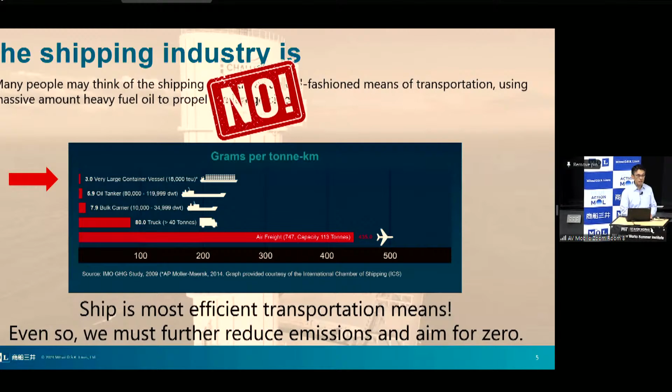Although shipping is already efficient in terms of emissions, I like to say that we have to aim for net zero emission from shipping services as well, towards the end of 2050.

This is the beginning of my today's presentation. You can see the vessel on the sea, and you can see the sail, a big sail at the front of the vessel. So I'd like to say welcome to the new era of shipping, and let me continue.

If we look at the global activities and ambition towards the reduction of greenhouse gases, you can see that in 1997 in Japan, the global countries announced the Kyoto Protocol, which I think is the substantial start of thinking about decarbonization for the future. Our challenge, the Wind Challenger project, starts after the Kyoto Protocol and before the Paris Agreement.

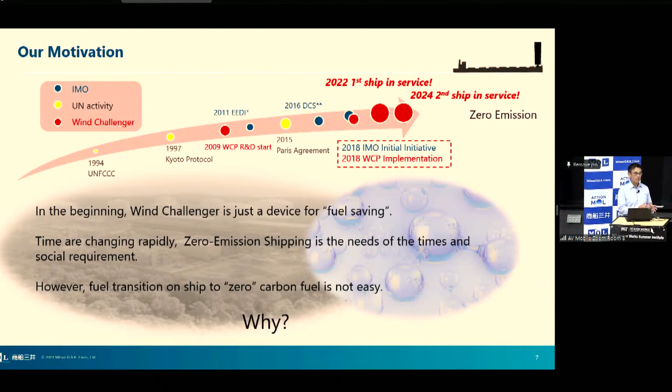I'd like to say why we started this program. Initially we were thinking this program would contribute to saving fuel, meaning saving the money we spend. But time has changed, and now we all think about net zero emission, decarbonizing, reducing greenhouse gas emissions from industries. So nowadays our technology is more focused on the purpose of reducing greenhouse gas emissions from ships.

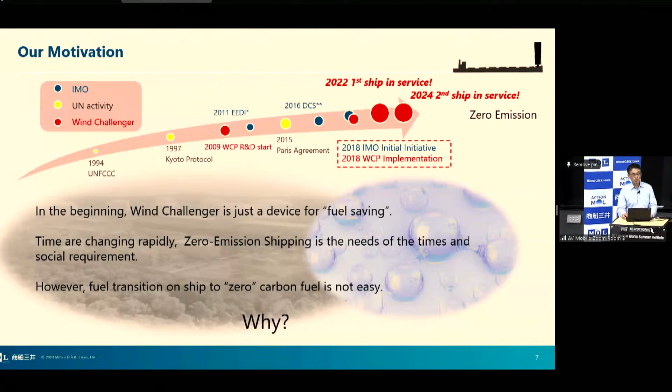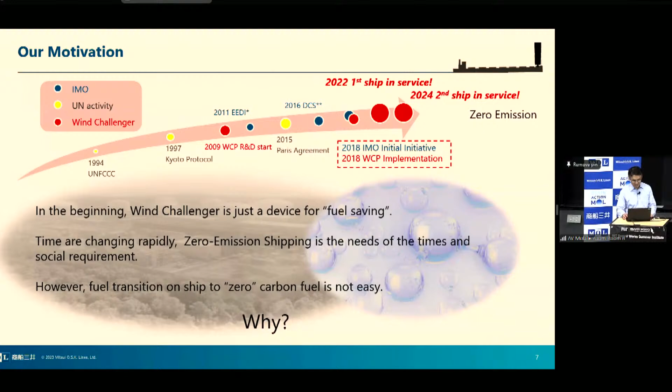But I'd like to say that net zero emission of shipping services is really difficult to achieve. Many people say that shipping and aviation are the hardest to abate business sectors when it comes to decarbonizing their businesses. The reason why is that technically we already have hydrogen-based fuel, liquid hydrogen, ammonia as a hydrogen carrier. This is already technically available, but it costs a lot compared to the existing crude oil-based fuel of the maritime industry. Probably the price of the new generation green fuel is more than 5 times higher than that.

Also you can see on the left the lower energy density. Compared to oil, these hydrogen-based fuels have less energy density per cubic meter, for instance. That's why, in short, we need to secure large spaces on board to store the energy to propel the vessels, which means we have to use many spaces just for keeping the fuel. We really want to carry the cargo. We don't really like to carry the fuel only. That's why this is really the challenge.

That's why we're thinking that first, towards net zero emission of shipping, we have to try to minimize the consumption of energy as much as possible. There are many technologies, and today I'd like to introduce one that we are very ambitiously trying to achieve.

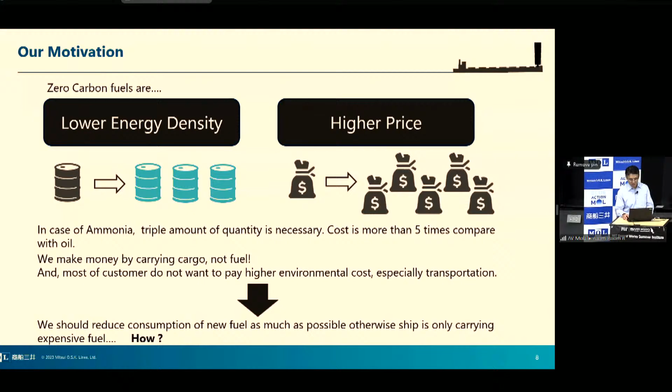Before coming to more detail, I'd like to touch upon the history of ships a little bit. In old ages, ships were propelled by wind sail only. There were no engines on the vessels, but it was less efficient, less speed. After the 19th century, we started to utilize steam turbines, and the fuel of the steam turbine was coal. But nowadays we don't use any coal for the propulsion of vessels. We changed to heavy fuel oil, which is a part of crude oil, with diesel engine technologies. And recently, we are gradually starting alternative fuels, particularly liquefied natural gas, which is a cleaner fuel compared to crude oil-based fuel.

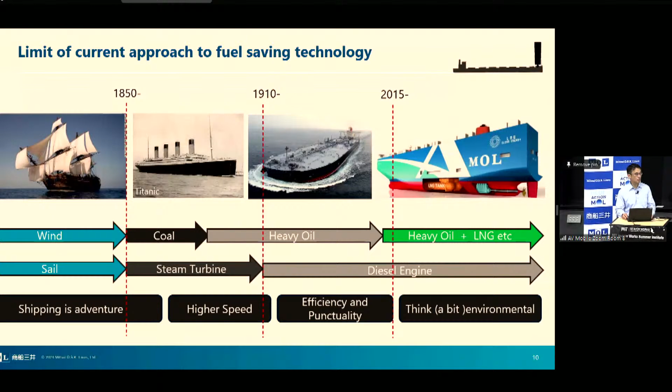But the technologies we have made for the purpose of reducing fuel consumption and energy emission from vessels mainly happen underwater of the vessels. This red dotted line is the water line. In history, many engineers tried to make every effort to minimize the reduction and minimize the friction of the drag, whatever the things, in order to reduce the resistance on the hull. Engine technology has also been developed from steam turbine to diesel engine. Everything happened under the water.

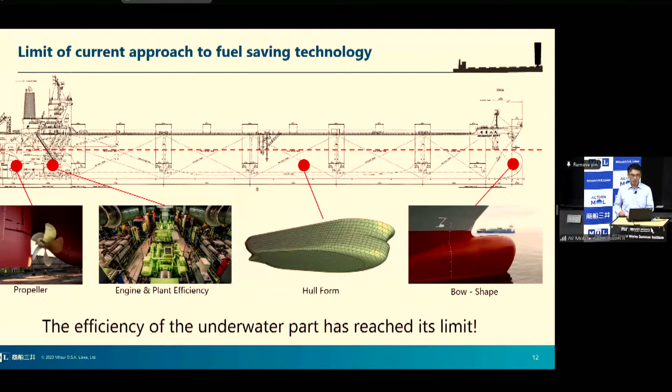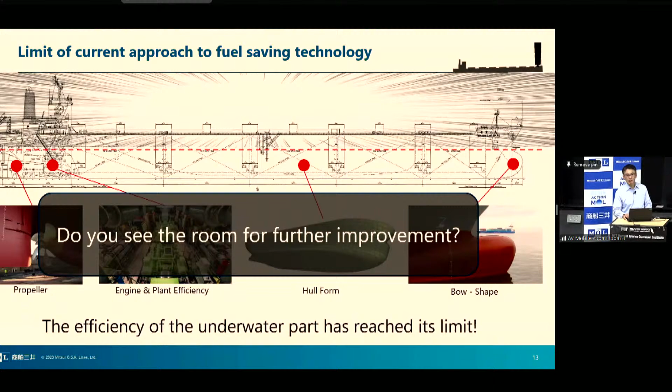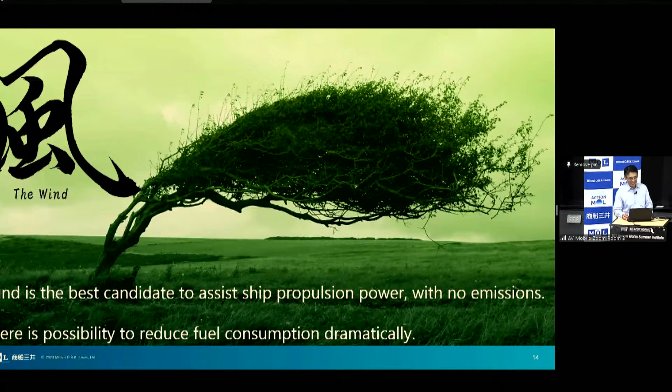But do you see any room for further improvement for shipping technologies? We are thinking, why don't we think about the spaces above the waterline? That's again the wind. I mentioned that in ancient years we used wind power to propel vessels. Let us think about wind power again. Our way of thinking is that, of course, we maintain the existing ship technologies, but on top of that, if we have a set of wind sails like this picture, what happens? How much savings can we achieve? Let's imagine.

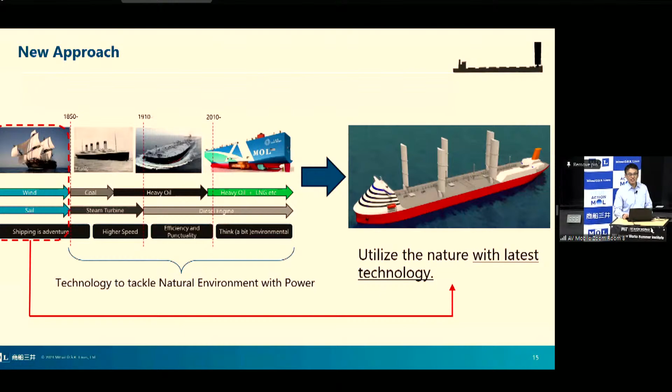So we started with this concept, initially as a research and development program.

Initially in Japan, the program was launched under the name of the Joint Industry Project. The leader of this JIP was Tokyo University in Japan, and several industry players, including MOL and other shipping companies and manufacturers related to shipbuilding, joined the program

in order to launch wind sail technologies in the shipping industry. You can see the videos. Sorry, today I have videos but no music, but I'm going to explain what's going on. This is an onshore-based trial showing what happens if the wind sail moves like that, and how the effect will be.

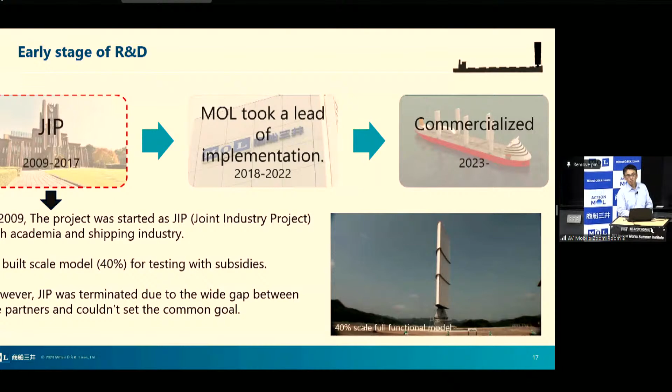Initially, for more than 7 to 8 years, the university-led JIP made some achievements. But unfortunately, many partners, our competitors in Japan, and manufacturers left the JIP, because in those days people didn't really feel that this technology would fly.

But we were thinking that this project was too good to terminate. We believed we should hold higher expectations that we can use wind power for vessels. That's why we decided to take the championship to continue this program. I'd like to say this is the start of the suffering and the many programs leading toward the achievement, which I can explain later on.

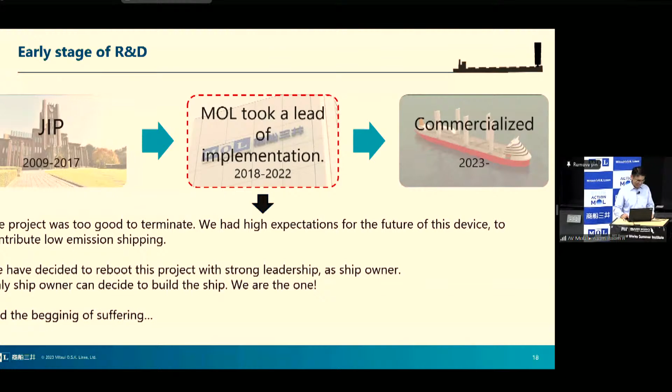After the research and development phases, of course we need to jump into the design and engineering phase. The JIP brought some ideas and outcomes, but this was just an on-land basis demonstration of the wind sail.

But we are operating vessels, and the sea environment condition is much tougher compared to the onshore environment. That's why we have to think about the behavior of the wind sail if we install it on vessels, because the ship is always exposed to heavy wind and wave, and the ship is always moving.

And we want to really carry the cargo, we don't like to waste it on the steel product. That's why we have to think about reducing the weight of the steel. This is another challenge.

Also, in the shipping industry, shipping companies always have to take insurance for their services from insurance companies. In order to get insurance from a third party, we need to assign a certain certification body to make sure the product is really okay from a safety point of view. That's why we have to engage what we call the classification society, which certifies the project for maritime use.

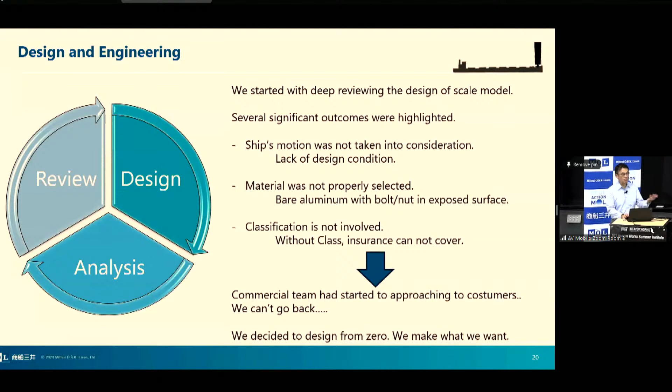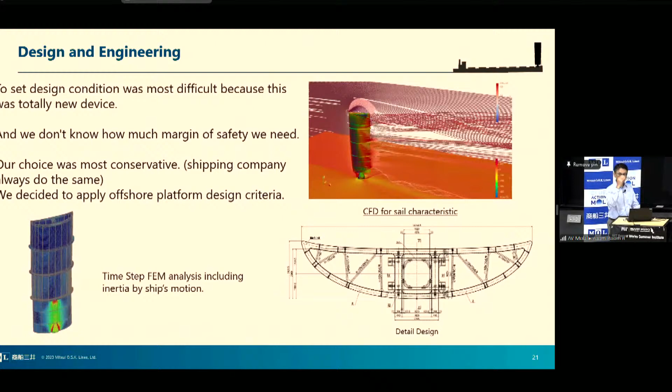For design and engineering, we have quite nice means of calculation, like computational fluid dynamics - you can see at the top. Also, structural rigidness is quite important, so we have carried out calculations to estimate how rigid our sail is.

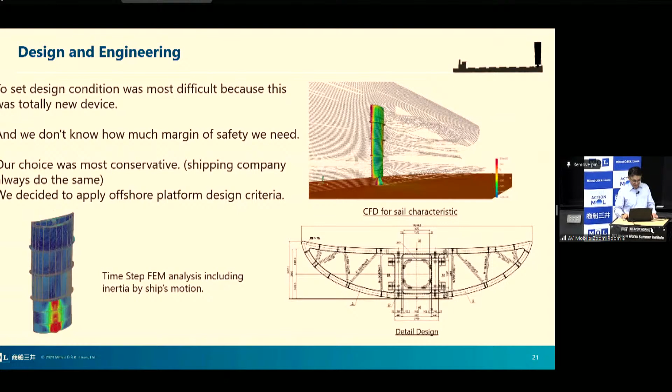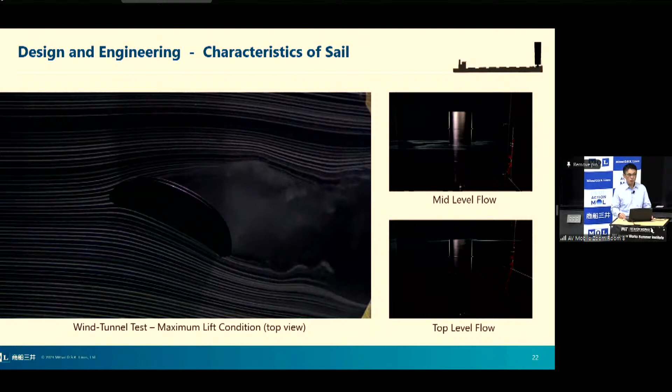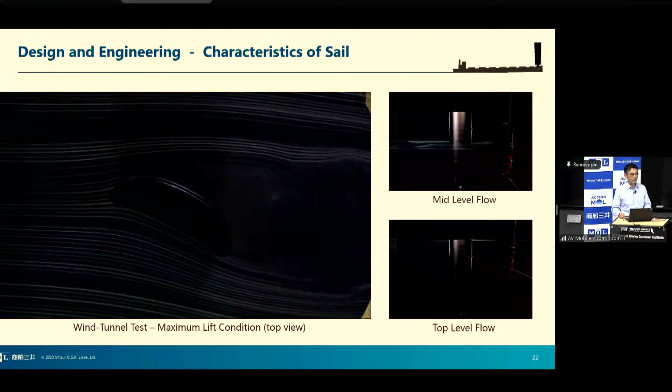Also, calculation is not good enough in many cases. That's why, in order to evaluate the efficiency of the wind sail, we have carried out wind tunnel tests to visualize the airflow, and also estimate and calculate the lift activated on the sail. You may imagine that the wind sail has exactly the same features as an aircraft wing.

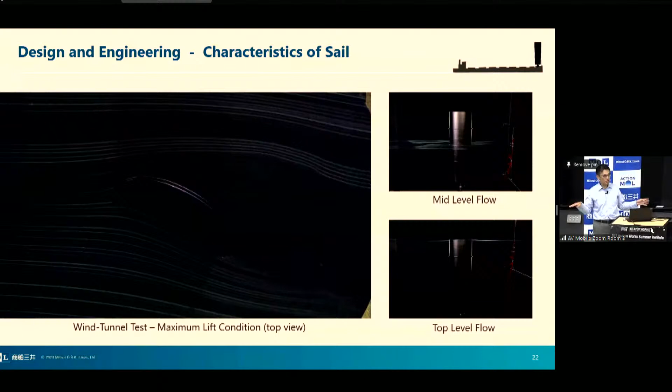Having carried out those calculations and wind tunnel tests, we came to the theoretical conclusion of what wind condition is the best fit for the purpose of saving energy on ships. In short, I'd like to say that if we have wind from the left or the right relative to the vessel, this is most efficient.

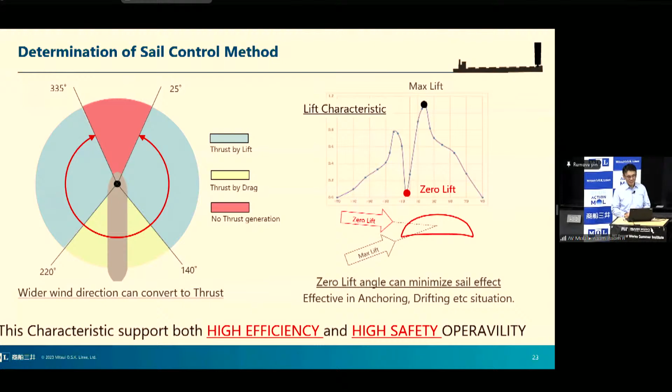More specifically, if the wind is coming from the head, from the front of the ship, we don't really expect an improvement in efficiency - we don't really achieve lift from the sail. That's why, if we have a headwind, we don't use the wind sail. We try to position the wind sail as shown in the picture on the left, lowering it down in order to minimize the drag caused by the wind sail.

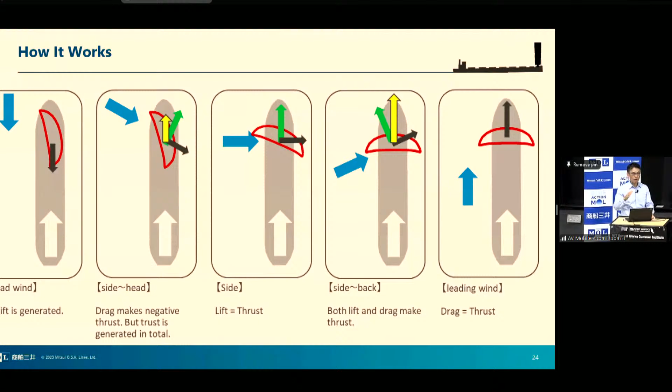But if we see a lateral wind, we start to operate the wind sail like that, and we assume a big lift happens on the wind sail, and this thrust helps to propel the vessel. The engine propulsion power is then reduced, so we can minimize the energy consumption of the engine itself.

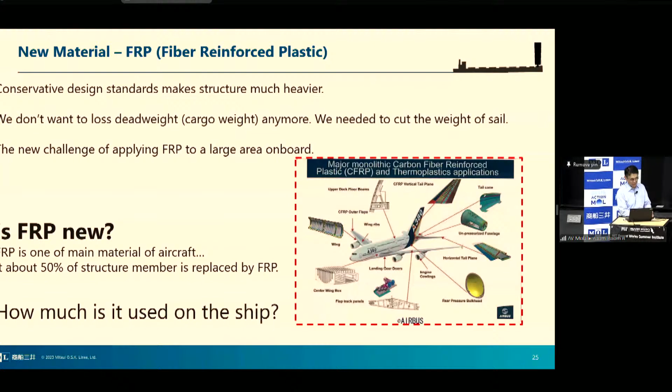On top of that, the material is quite important to make the product as cheap and light as possible. So we came to the conclusion that we could probably use FRP, fiber reinforced plastic. The weight of FRP is much less than steel or any other metal product.

We can imagine where FRP has already been used on vessels. This is one of the vessels we operate, a very large crude oil carrier, with a length of 300 meters - quite a big ship, mostly steel made. FRP is only used for this area, which is a kind of rescue boat for the purpose of people working on the vessel to evacuate from the ship if an incident happens.

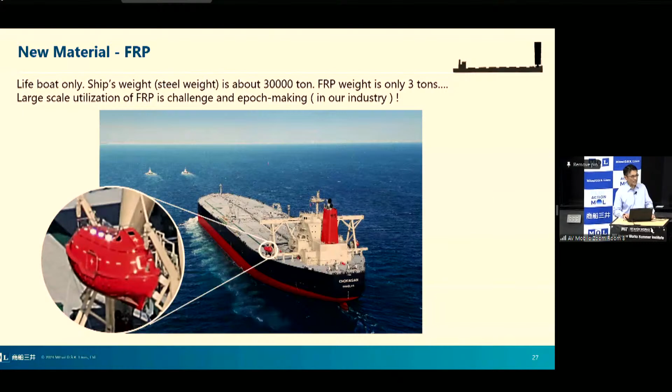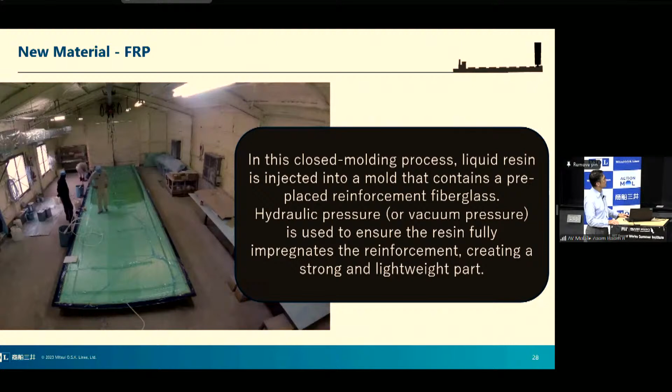You can imagine that most of the material we use for the ship is steel-based. That's why we tried to challenge that with FRP used for other parts of the vessel, the Wind Challenger. This video shows how the FRP-based component of the wind sail was made. Plastic was injected into the mold made of fiberglass. We exercised many trials to ensure the quality and strength of the components of the wind sail.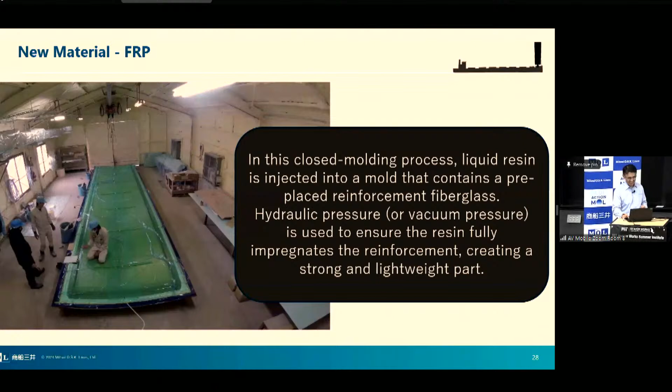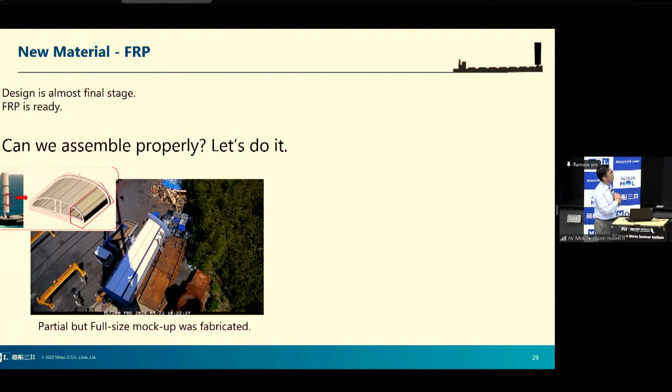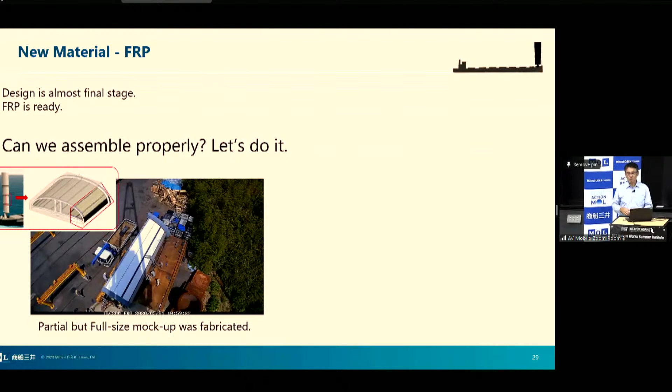After that, each component needs to be assembled into subcomponents, as this video shows. This demonstration was made in a certain shipyard, which is collaborating with us to build this Wind Challenger. We found that the assembly of the plastic-made sail is okay, we can achieve that. This is a milestone for the next, bigger assembly of the sail.

In the meantime, because this project is quite MOL-oriented, we really needed our management's understanding of the project. While we were making this trial sub-assembly of the components of the wind sail, our chairman of the board visited the site and he admired what we were doing so nicely. We also have an internal college for young colleagues working in MOL to present on the management of the future of MOL. I forget the year of this program, but in a certain year the theme of the program was sustainable shipping.

One of the guys proposed that we use this technology on a more real and bigger scale. This presentation made by a young employee really motivated and encouraged the management people. Management realized that we technical people might be doing very well for future technologies, so management started to support us. This moment was great. Without that, I don't really think we could have moved further.

Finally, engineering drawings were completed, 60 drawings for the purpose of constructing the wind sail entirely.

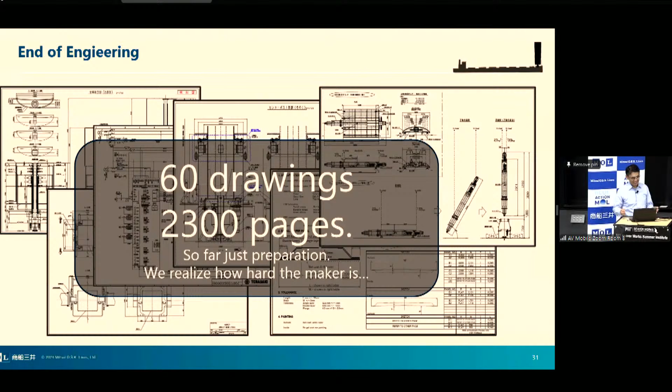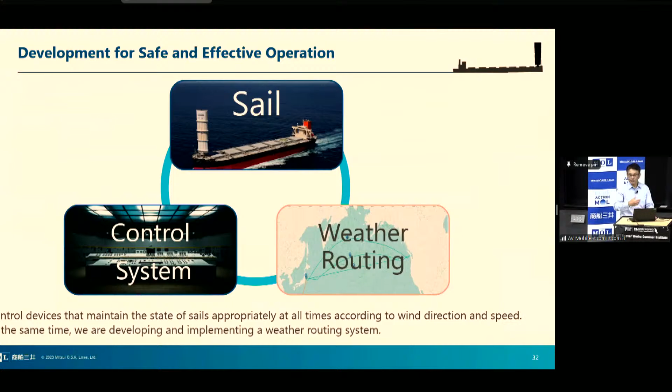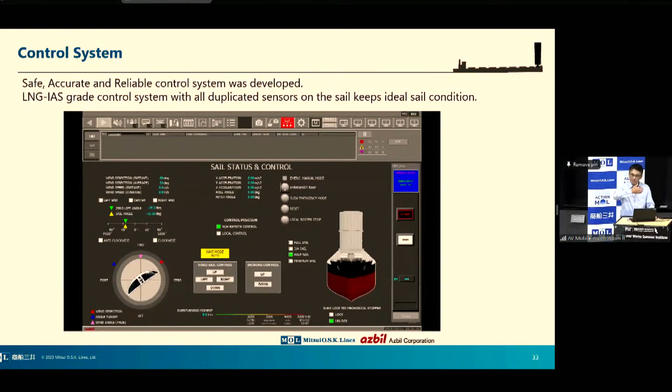On top of manufacturing the sails, it's really important for us to consider how efficiently we can use this wind sail, meaning control of the wind sail according to the weather and the weather forecast. So we worked together with a certain IT system vendor on how to nicely control the wind sail according to the weather and the weather forecast.

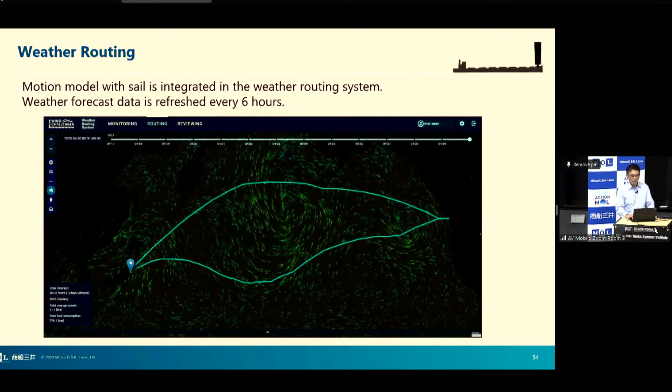More importantly, we're talking about weather routing. If we just transport from A to B, we usually take a great circle, which is the shortest distance between A and B. But now we're trying to use wind power as much as possible. That's why, ideally, we really want to catch a nice lateral wind as much as possible.

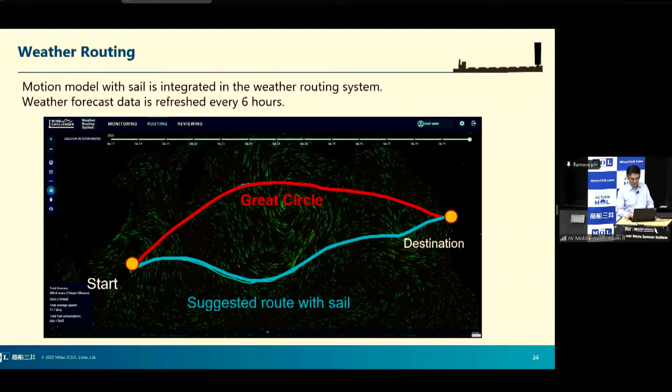A simulation showed that the suggested course, shown in blue, even though it deviates a lot from the great circle, probably saves more energy by taking that course. That's why we introduced this kind of weather routing system on the vessels, and this has already contributed a lot to savings in energy and emission reduction.

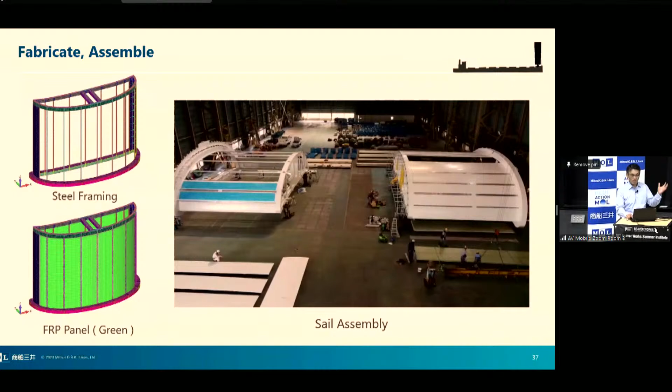This is towards the last moment of the presentation. You could see in the previous slides the sub-assembly of the components of the wind sail. This is the full-scale assembly of the wind sail. This is a shop in the shipyard, so we need big spaces. Without collaboration with the manufacturer, we wouldn't be able to achieve these challenges. We need partners, certainly, because we are a shipping company, not a manufacturer.

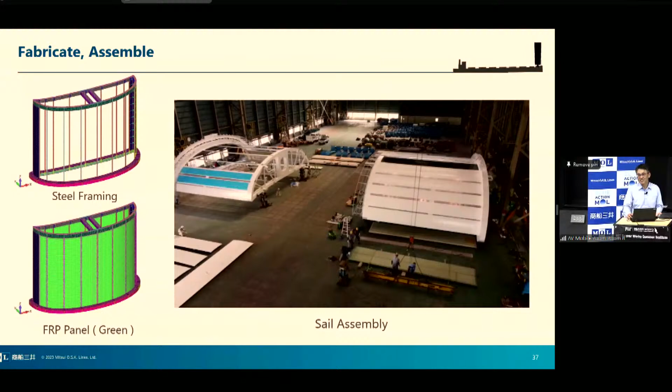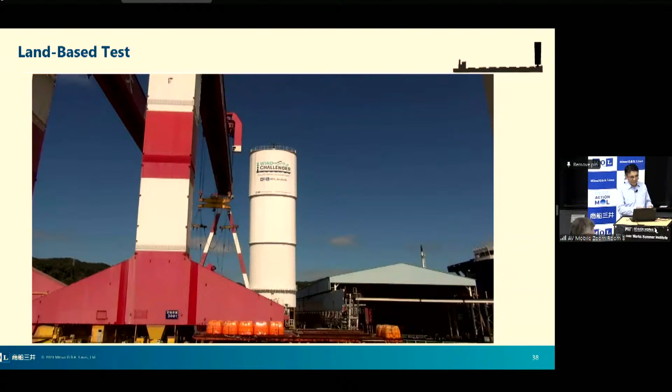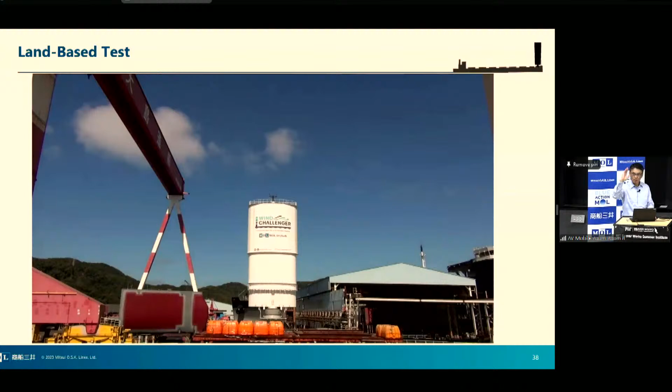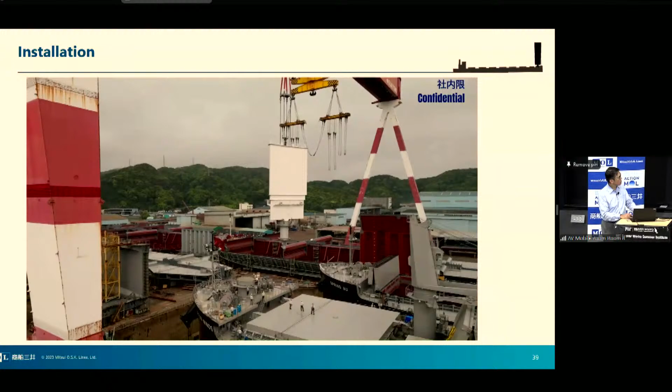This is the Wind Challenger actually installed on the vessel. Initially, we tested everything on the ground at the shipyard, ups and downs and rotation, everything confirmed. After that, we actually install it onto the vessel. Vessels are constructed on the dry dock in the shipyard, and once the vessel is mostly constructed, we install this wind sail at the fore.

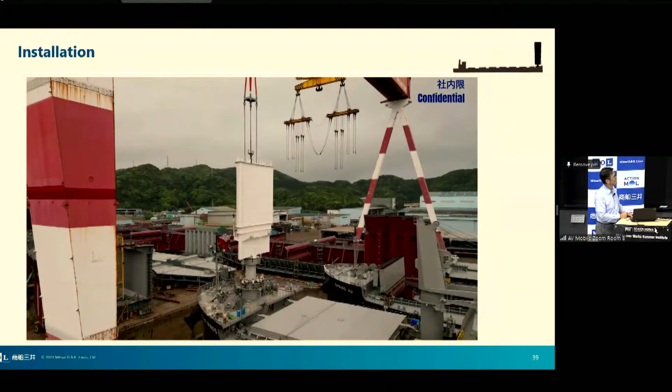And we have actually retrofitted the Wind Challenger on the vessels. It's time to see the results. This is a sailing trial where we tested the sailing system. All mechanisms worked very well in the sea. This trial was demonstrated before the ships were delivered from the shipyards to MOL. Our people joined together with the shipyard people and confirmed that the system is working quite nicely.

I have to say that in actual weather conditions we operate the vessels, and this is not calm weather at all. We mostly encounter heavy waves during the sea passages. You can see this vessel having the Wind Challenger encountered a very rough sea on a certain day, and you can imagine that the wind sail is exposed to high waves. So as I mentioned at the beginning, the wind sail should be rigid enough. If we operate the vessels in a cold and icy environment, icing happens on the structure of the sail. It's a bit difficult to see, but the picture on the left shows icing on the components of the wind sail. So the wind sail needs to be good enough to operate even in icy conditions as well.

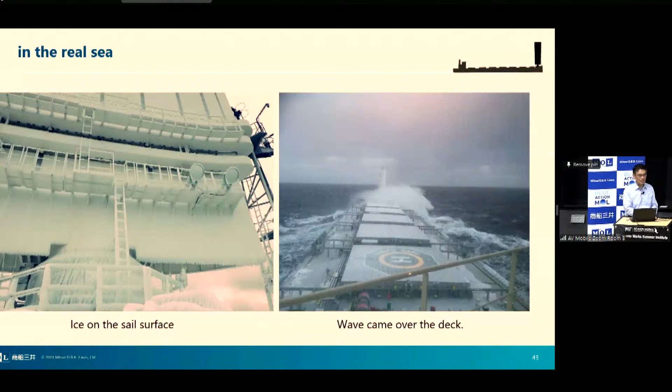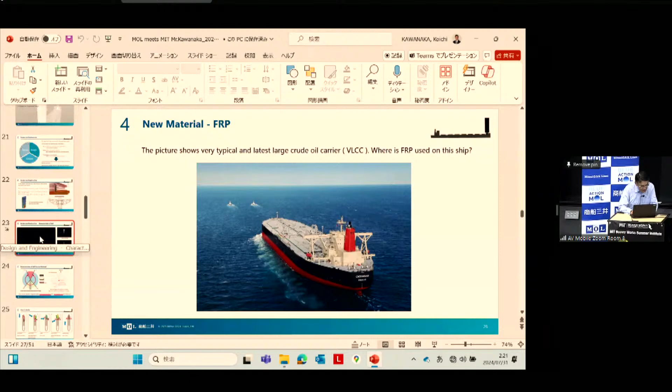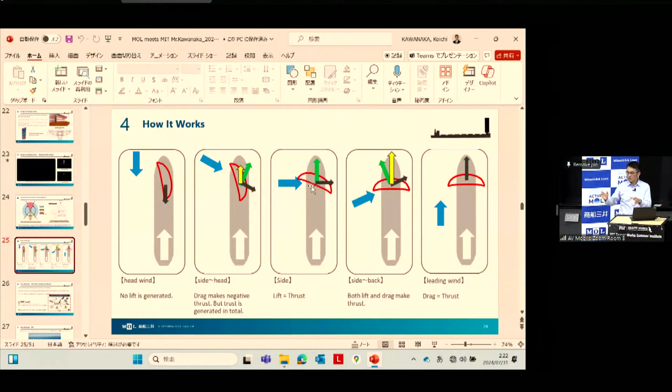I think it's because of the mechanism. Ideally, as I explained, we can expect a maximum lift, a thrust, if the wind is coming from the left or the right like that. In order to catch these forces, the sail, the square meterage of the sail itself, if we can have it large enough, that's good. That's why we are trying to have a rectangular shape of the sail. This is most efficient.

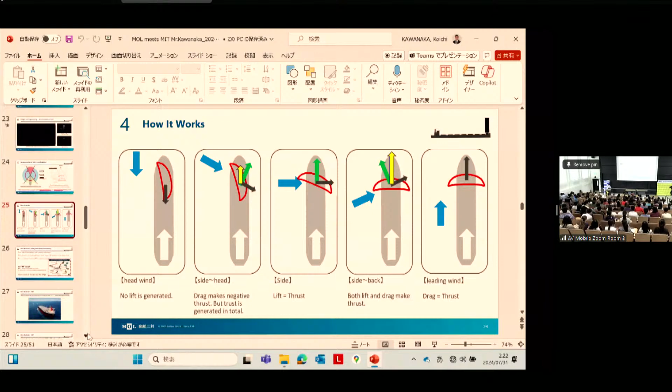I thought the idea of using lift, not just drag, for thrust is really cool. But I also saw in one of your slides that you said you had a 17% energy saving rate or fuel saving rate. Where's the rest of that 83% going? Is this in combination with an engine to reduce the load on the engine, or is it just all by itself? It's just the savings because of the sail, yeah.

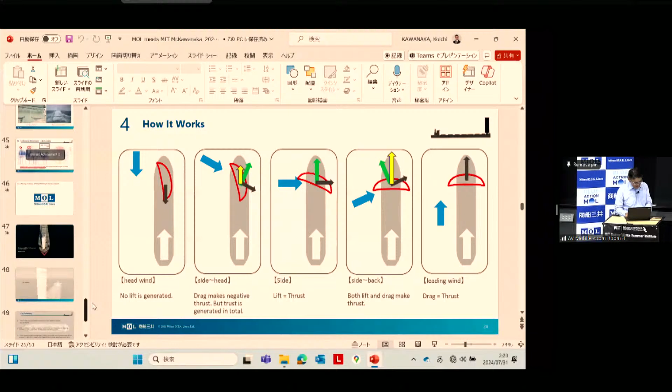Yeah, how we... which slide? It's... there.

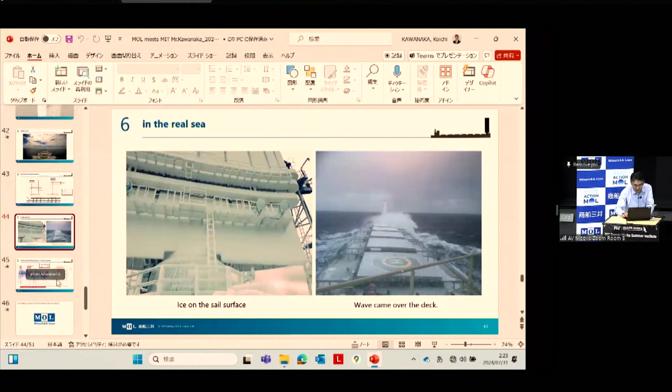This is a saving just because of the wind sail. What happens is that we try to reach a certain speed. In case we don't have any wind sail system, we have to run the engines at a certain output. How we measure the effectiveness of the wind sail is that if we reach the same speed, and the wind sail contributes to the reduction of the propulsion power, the engine output is going to be less and less. The analysis contains a theoretical assumption of what the saving would be if we operate vessels without a sail. We estimate that based upon the actual weather we encountered, with simulation by calculation, and compare the actual results having the wind challenger to this theoretical assumption. This is the methodology for how we evaluate how efficient we are when operating the vessel with a wind challenger.

So I was wondering, if I were to make a long-range autonomous remote control boat, would it be a good idea to implement this type of technology to improve efficiency? Why or why not?

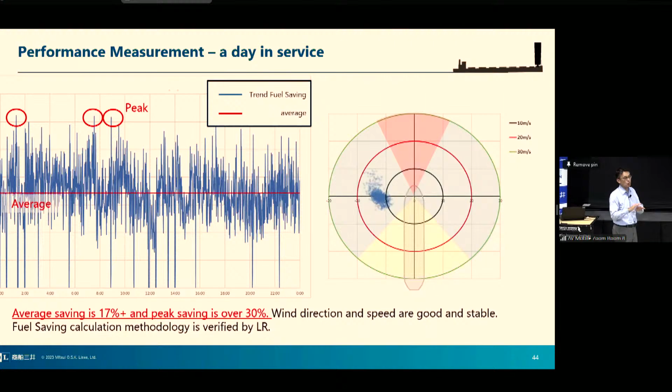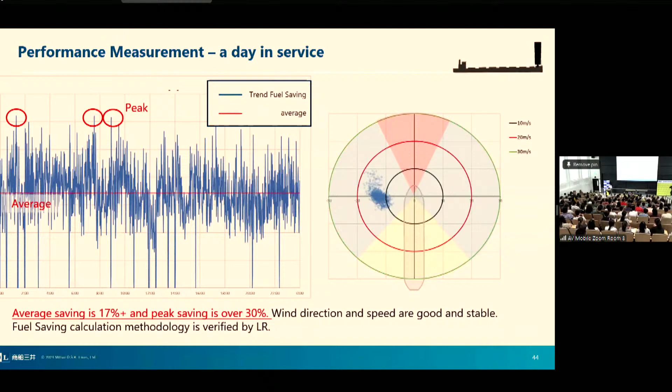Yes, so maybe I can help answer this question. I think it is a function of what your objective is, and the size of your ship. If your goal is to go fast from point A to point B, maybe this is less useful. But if you want to go long distances with a minimum amount of fuel, then this is a very helpful technology.

So I think it depends on what you are trying to accomplish. I think we have a question over here, but I want to add that innovation happens in many different ways. And the fact that you're taking sail power and something as pre-existing as shipping and applying innovation to it is super cool. There are so many opportunities for data science applications, whether it's wind, shipping, or sail management.

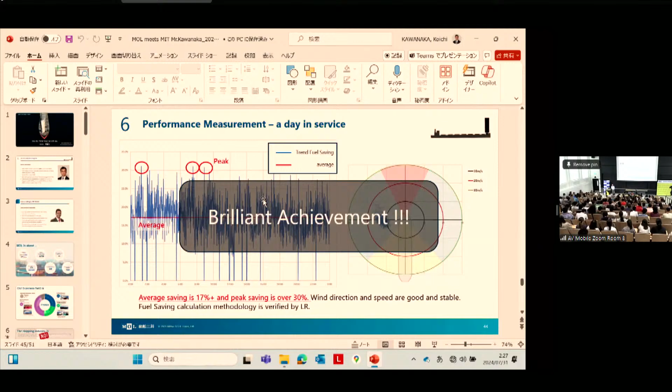I was wondering, for similar large size projects like this, does MOL typically have separate groups of engineers prototype ideas and then fund those afterwards? Or is it typically a whole organization level thing, where they might fund something like a wind sail, and then the engineers decide how to prototype and develop it afterwards?

I think that's a good question. Indeed, in the history of MOL, we had a certain but limited number of milestones where we actively developed the technologies. Besides Wind Challenger, probably only one or two. The reason is that we are not a manufacturing company, we are not a research and development institute. But as a user of the technologies, we operate the results at sea every moment, so the user mindset to encourage the manufacturer to really materialize more enhancement or innovation is quite important.

So to be honest, we are not the manufacturer, that's why we have a limited resource of technical people indeed. I mentioned that we have almost 9,000 people in the MOL group, but we have technical people only probably 150 maximum. So what I am thinking is that sometimes a great idea comes from certain nice guys who are very creative and innovative. But in most cases, what's most important for us is to have a network with technology companies and try to demonstrate these technologies on our vessels. Particularly in the US, we are excited to see many startups relevant to maritime technologies. This is the most important thing I'm always telling my colleagues in order to think about the innovation of our industry and company.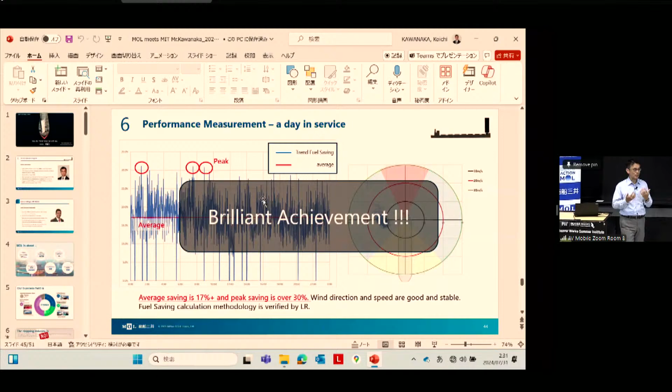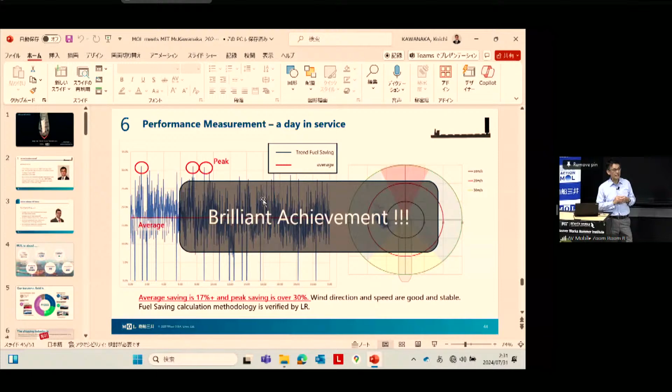I have to accept that there are many competitors of the Wind Challenger, similar systems as well. Each one has their own methodology to measure effectiveness. So probably sooner or later, some independent third party needs to establish how to evaluate the energy savings with a common methodology. Without that, people may think that you are wrong. So I think this kind of activity is going to start up right now, because there are many potential wind sail technologies, not only by ourselves. And on top of answering your question,

how are we going to compete with other systems? I don't like to say that we don't need to compete, because at this moment this technology is not commercially matured, even if it's technically matured. That's why sometimes it is worthwhile for us to try other technologies as well and compare with our own, and this will really enhance the further maturity of the Wind Challenger technologies. Also, if the amount of technologies delivered to end users like ourselves is limited, but we have access to other technologies expecting a similar effect, why don't we take the others as well? Meanwhile, we are encouraging ourselves, increasing maturity and scale of production. And of course, I wish the Wind Challenger becomes the mainstream wind propulsion system in the near future.

Considering that MOL is largely a shipping and cargo company, is your main goal to become as big as possible, or rather to transform the shipping industry?

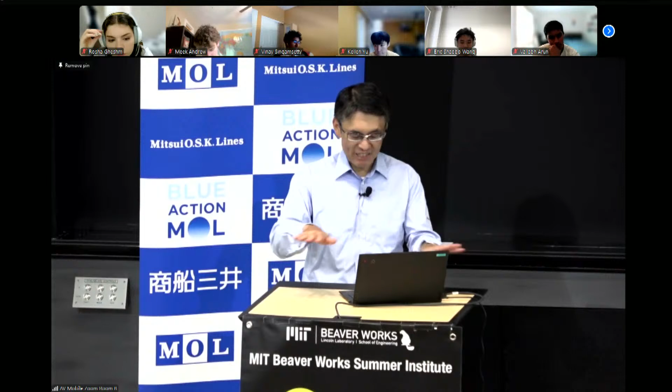We don't ask the owner of the vessel to bear it. A vessel's cost is going to be minimum, only the design, and probably the design is also equalized, but the material and assembly cost is only the cost for the sail, for the commercial scale.

Thank you, I think we're on our last question. Go ahead. Hello, I was wondering, for the Wind Challenger system, what kind of boats do you expect to put it on? What kind of fuel savings are you expecting, and do you expect to shrink the volume of the fuel tanks so you could add in more cargo? Would you think the Wind Challenger is a kind of technology you'd be able to rely on in the future?

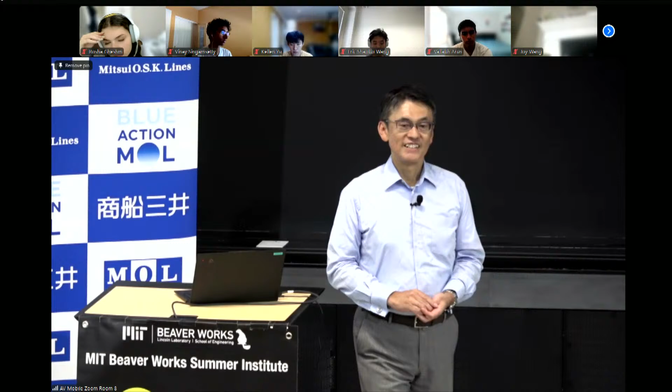Yeah, actually the Wind Challenger has a certain weight, I don't exactly remember, but probably 20 or 30 tons of steel and FRP, or even more. But we basically have very big vessels, carrying 50,000 to 100,000 tons of cargo. Compared to that, the weight consumption for the Wind Challenger is minimal. As long as we carry cargo with big vessels, the impact of the steel weight increase of the Wind Challenger is minimum.

But when it comes to installing that on a small boat as well, this is not negligible. So it depends on the mode of transport and the size of the vessel itself. But basically, we are looking at the big vessels.